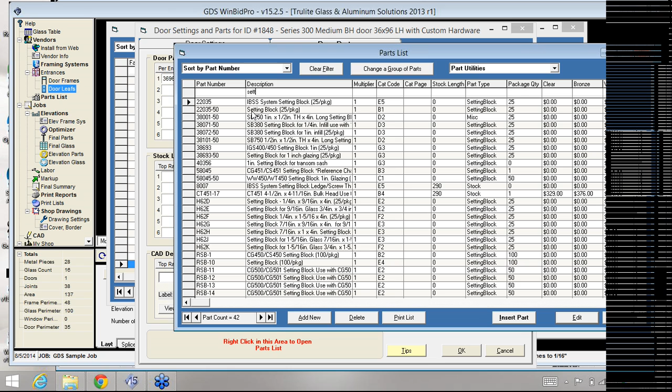Let's see, setting blocks - so I can search for the part, and here's a setting block right here. So I can go ahead and add that, say if I needed those and they didn't come with the package.

And then I can say I need 2 of those, so I put my asterisk 2 here, and it's going to give me 2 of those per light. So whether or not I'm using a muntin bar, it'll figure it out.

Then we've got, let's go down here to stock length. So if we are building or fabricating our door out of stock length material, this is where we put the part numbers in - notice we have the mid rail, top rail, bottom rail, mid rail.

But we also have the hinge style and the lock style, and for the pairs, the pair meeting style. So it covers basically all the stock lengths you would need.

And then you've got your glass stop here and the glazing gasket here, which is by the foot. So if you do fabricate and manufacture your own doors, you can have it show you the stock length cutting on your cut list, figure your gasket material required, and down to the glass stop material.

So that's it. Now, this one doesn't have any details for doors, but if you do have details for doors, it's the same as the framing systems and door frames, where you tell it...

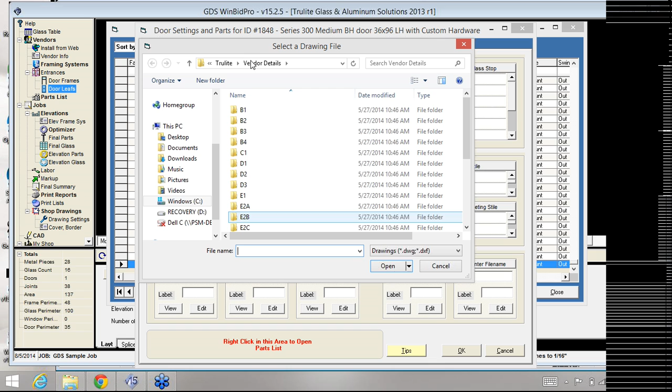Let's see here, I believe we double click in the file name field here, and then it'll bring up our browse window.

Let's say you downloaded a detail from the internet and you needed a top rail detail, or whichever one of these details you wanted. And even if it was a complete door detail, you could just put that in any one of these fields and it'll pick it up and show you that complete detail as well, even if you don't have the individual details.

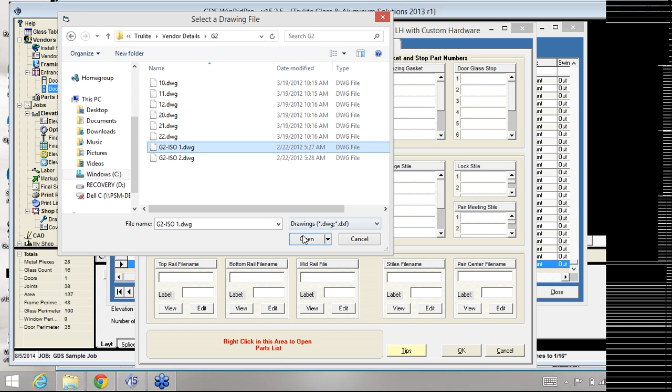So I could browse for one. If I knew this was my door detail I downloaded, I could select that and hit open. And then it adds it to this field, and then we can view it. If it was the correct detail, it would show us right here. So that would be included if you went ahead and did shop drawings for any job you added this door to, it would show you that detail.

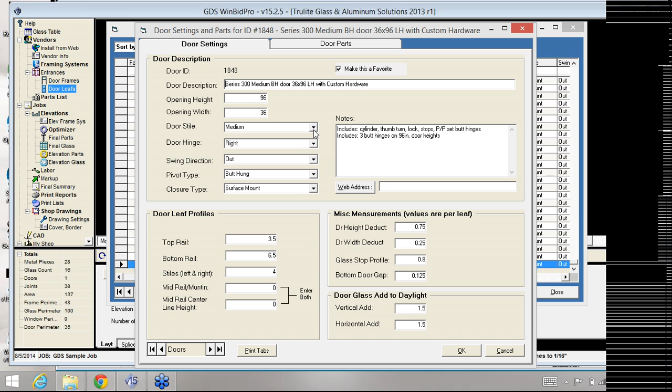So again, very similar to how it works in the framing systems and the door frames for details, showing details. So that's in a nutshell what your door leaf configurations look like.

Now let's go ahead and add one to a job, and then we can mess with it. So let's go ahead and create a little test job here. Door test job, finish is fine, and I always just like to call it first.

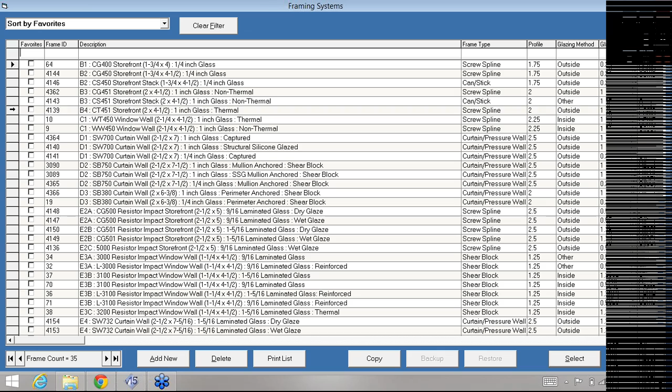Now let's have some side lights here, so I'll just go ahead and pick any old system. Here's a storefront thermal system, so I'm going to pick that.

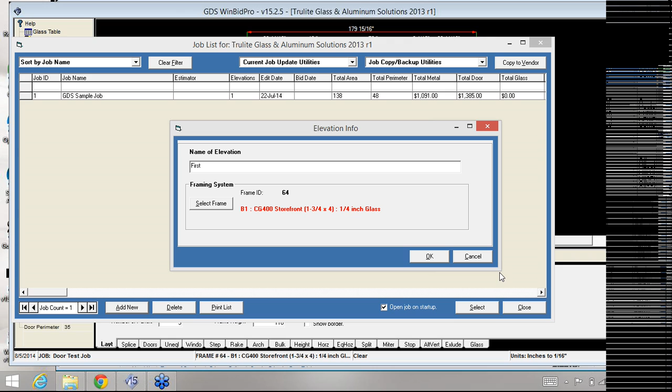And I knew I'd have that problem. I think I forgot to update my software on my computer. I apologize. So let's... now it's going to give me trouble here, isn't it? Let's see if it'll let me get out of this with a different... no. Okay, I apologize guys, I'm going to have to Control-Alt-Delete. If this ever happens to you, Control-Alt-Delete is the way to go, and then we can end the task and start the program back up. So, sorry about that. Yeah, I think I just forgot to update my laptop here. I don't use this much for the software.

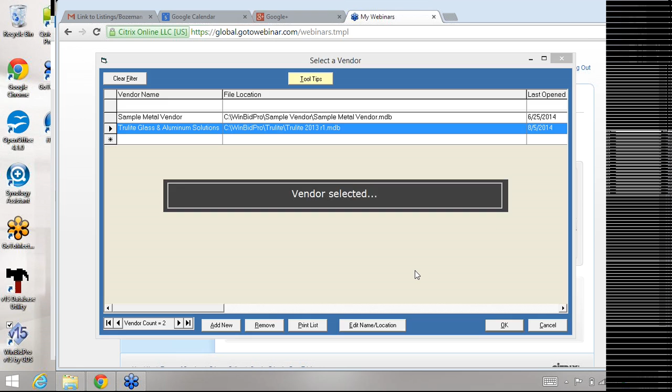But what we'll do is we'll mess with these doors here. And actually what I'll do is just create a new elevation. Let's see if we can do that. Okay, sorry for the other trouble.

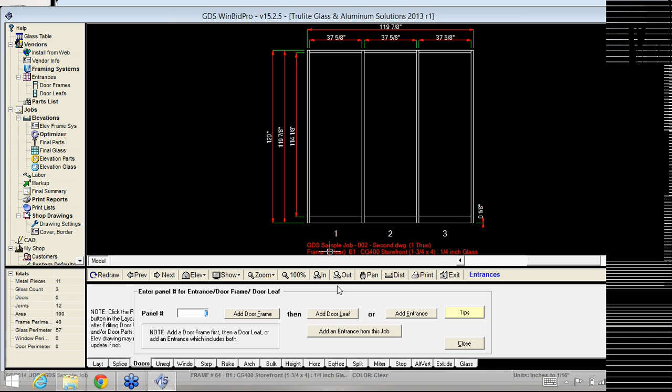So let's say it's 3 panels, 120 wide, 120 tall - kind of my standard frame. And then let's go to the Doors tab. We're going to say Add Entrance. Now remember, I tell it what panel I want, and if it's a manufacturer that's configured entrances - which is our next webinar, by the way - if entrances are configured, then we can pop that up and it'll put a door frame and door leaf in one shot.

And I can use the little filter bar here if I wanted the 96. There aren't any entrances configured for that, bummer. So let's go ahead and put a single right hinge, left-handed, in this opening. Now that stuck the door frame and the door leaf in there.

So now to see what the specs are, or what the settings are for that door leaf, I'm going to hit Edit Selected Door Parts. That's going to open up the same screen we were just looking at. So again, this is an 3684. If I wanted to make this - and here's what I like to do...

Usually I change the frame first, but if I wanted to make this a 94 by 38, just some oddball size, I would change those values here. I like to tab down to the next field. Now what it should do, if I hit redraw - sometimes it doesn't redraw the first time, so I'm going to hit redraw - you'll see there's a problem, right?

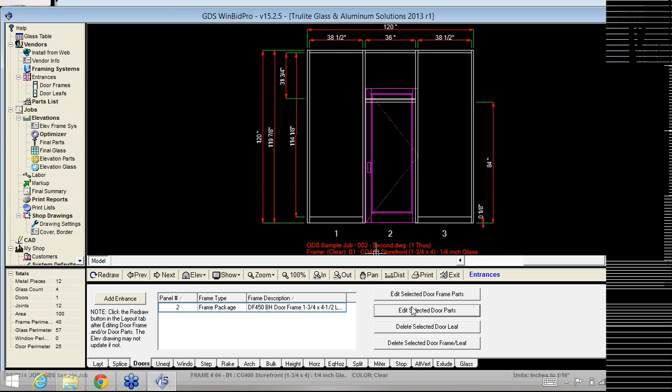So I put a big door into a smaller frame. Now I have to go in - it's showing me the height of the frame, but not the height of the door leaf. So now I forget already what I did - 94 by 38. So now it's time to change the door frame, so it's going to be 94 by 38.

So that's really what the door frame needs, is the same exact height and width that we entered for the door leaf. Again, it didn't redraw the first time, so I'm going to hit redraw, and now it's good. So now the frame matches the door leaf - that's what we want.

So the next thing we want to do. Now remember that when you do that, you're going to have to go in and make some adjustments to the part numbers, whether it's a custom door charge, whether it's a different package that you know of. I would just go ahead and add it here.

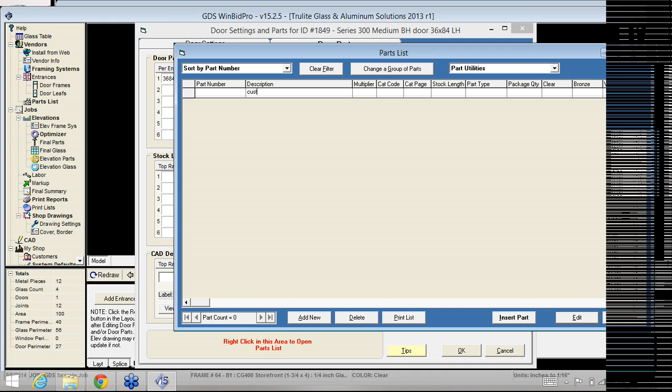So I'd click in that next row, go down here and hit look for the part number. I don't know what Trulite would call a door charge, but anyway, it could be any part that's basically needed for that non-standard door that we're working on.

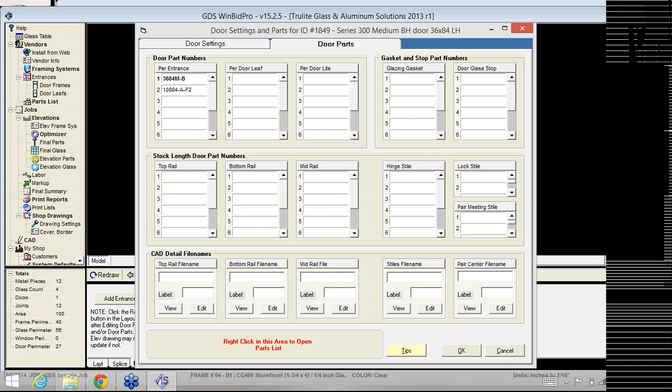So the same thing goes. I can click or just type in whatever part number I need for the door leaf. We're not really dealing with the door light stuff right now, but per entrance or per door leaf, I can just type them right there. So I've added those parts.

Oh, that was what I was going to say. So let's go back, sorry. Let's go back to here. Now, let's say the top rail is not quite 3.5, let's say it's something. Well, here's what we'll do: we'll do a 4-inch top rail, a 10-inch bottom rail, and 4-inch stiles. So we're going to make this so it's a little easier for us to figure the glass size.

And let's do that. So the door, let's say the height deduct is 0.5, the width deduct is 0.5, just to make it easier. So that would be a 1/4 inch on each side. This would be a 1/4 inch top and bottom.

Glass stop profile is 0.5, just to make that easier. And bottom door gap is 0.25. So that's another deduction in the height, basically.

But essentially, it's going to increase the gap at the bottom only and not center the door, top and bottom. So it basically determines how it shows, not only the height of the door, but how it shows up in the drawing. Let's go ahead and make these 1 inch for the added daylight.

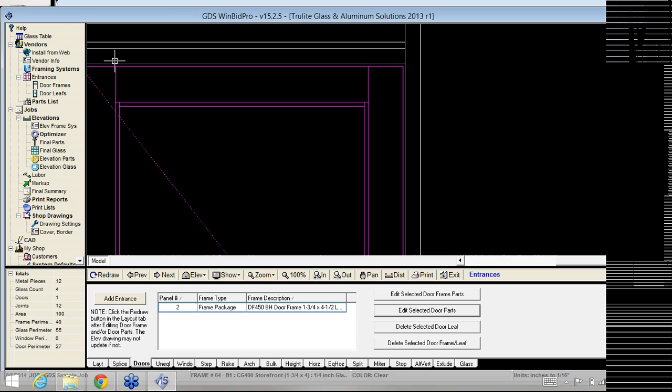And so here's what we got. Let's see if this shows up a little different in the drawing. I'm going to redraw. Now I'm going to click on my drawing and zoom in here. So if we zoom in real tight, we see the gaps around the door. So it's drawing it true, you know, WYSIWYG, or true to size, proportional, I guess.

And let's go down to the bottom. So even when we scroll down to the bottom, we see a gap down at the bottom for the threshold. We see the side gaps. So all that looks good. Here's our door stops, I'm sorry, our glass stops in the door leaf. And so it's done a good job drawing what we've entered.

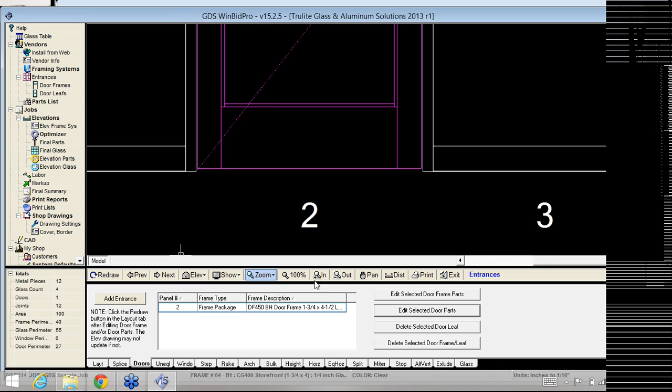So we've got our 4-inch stiles, our 10-inch bottom rail, all that. So now let's go and figure what the glass size should be. Let's go ahead and put some glass in there, actually. We'll just take any old type of glass, do it by light. Remember, for door glass, it's always by light. So we take that, we click on the door light, and now we've got our glass in there.

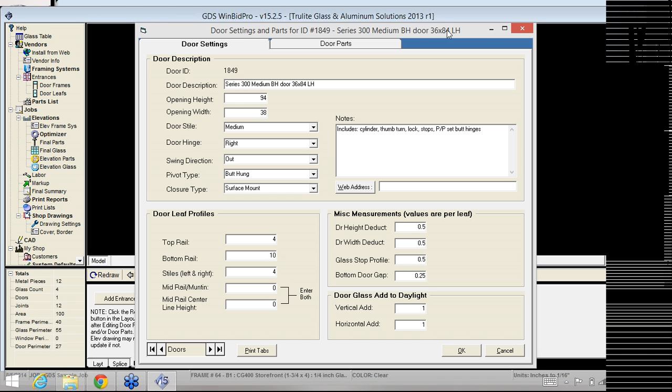So here's what we should be seeing with the door glass. We have, I'm going to go down here. So we have our 94-inch tall door minus our 10-inch bottom rail, so that's 84, minus our top rail, which is 4 inches, so that gives us 80. So the height of the glass is 80, less the 1/2-inch glass stop top and bottom, which is 1 inch. So that's 79 inches of daylight. So our daylight in height is 79.

So same thing for the width. Let's say we just use all those same calculations. Oh, and what we didn't take into account is the deducts here for the height deduct. So that's another 1/2 inch. So it's plus the door gap at the bottom of 1/4 of an inch. So that would be 79 minus 3/4.

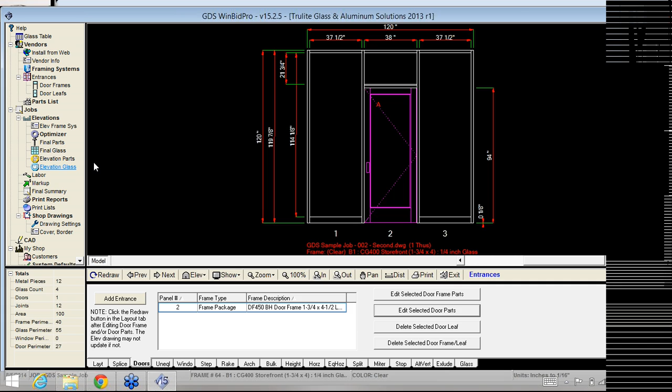So our daylight should be 78 1/4. Now we're adding an inch to that with our add to daylight, so that means we've got 79.25. That's what we should see when we go to our glass. So we're going to go to our elevation glass, our second elevation, and look at it. So here we are with 79 1/4. So we know that works right.

So as long as we are dialing in, obviously, our height and width, which is pretty straightforward, that's going to show us on the drawing. But if our rail sizes are true to size, based on the actual door that you're buying, our deducts are correct.

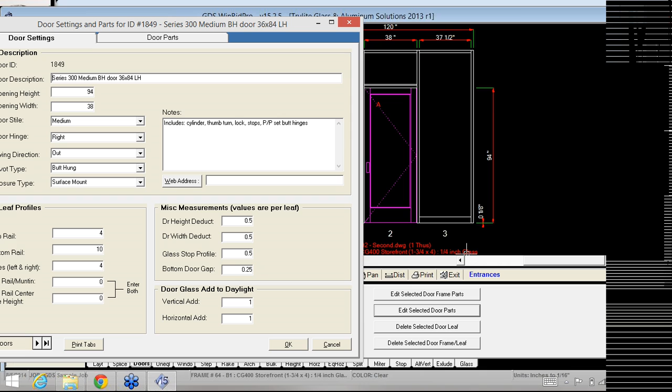So you can even work backwards. If you know the actual size of the door you are purchasing, you could work backwards and just make sure you're putting in the right dimensions here. You could even put in a top rail that is a little bit shorter and have no deduct. But the problem with that is the overall size. So really, you don't want to change your overall size too much. You want to make it easy to read, and make it the way it lists in the catalog and all that.

So anyway, that's how you would get your actual door glass size. You've got your correct added daylight, your deducts, your overall size is good, and your stiles and bottom rail. So all that is good, in terms of... well, hopefully you guys can hear me okay.

I'm on a Wi-Fi network right now, and it might be messing up a little.

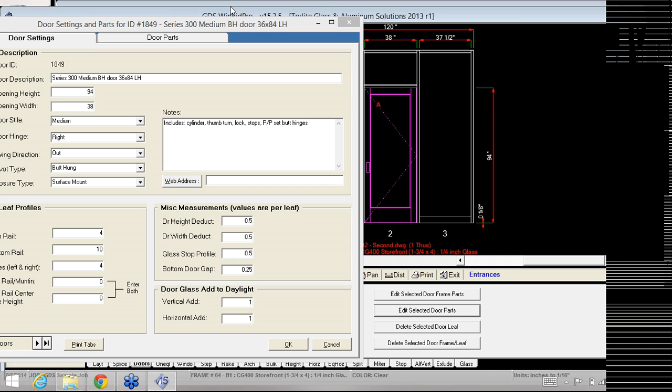Okay, so that's how you would dial those values in to get the actual correct door glass. And if it's not coming out right, the best thing to do, if you know your stiles are correct according to the catalog and all that, is to manipulate these deduct values - the width, height, and even the door gap. The glass stop profile should be true to size.

And then, of course, you can always mess with your added daylight for glass. The more you add to this, the bigger the glass gets. The smaller this number is, the smaller the glass gets. So it's a pretty straightforward relationship there. That's how you get your door glass correct, and that's exactly what you need to do it.

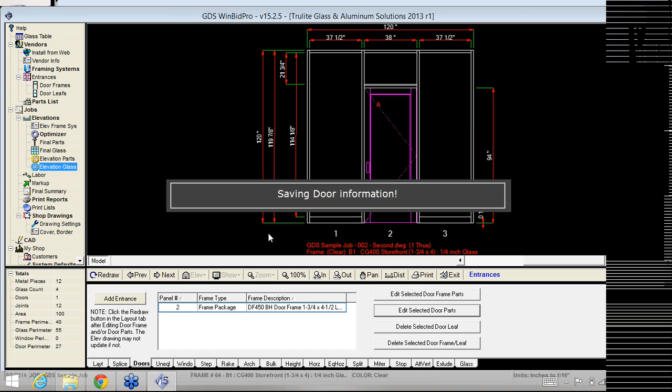So I had someone email me earlier about Herculite doors and heavy glass doors. So let's go ahead, and I'm going to use the same framing system. Let's just say this is a 2-panel opening - it's a Herculite and a side light.

And let's just say it's 110... oh, no, not that big. So let's say it's a 42-inch Herculite. Let's just say 60 wide by 84 tall, and there's no transom.

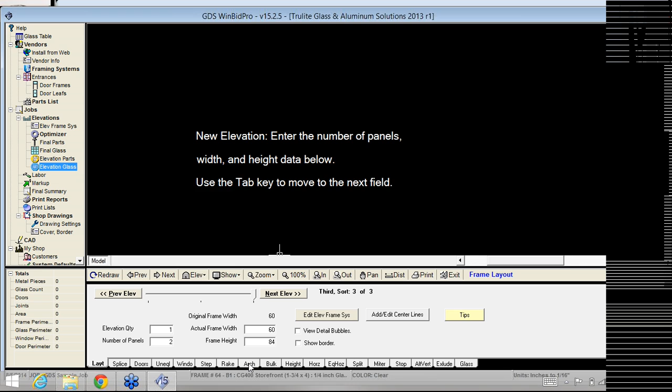So here's what we'd have to do. So we've got our basic elevation. I'm going to go to doors. If I don't have any door leaves and door frames for a Herculite, I'm just going to go ahead and put any old door in. So let's go ahead again - I'm going to put it in the first panel and add an entrance.

And this is going to go a little bit long maybe, so hopefully you guys have a few extra minutes to watch this. I'm going to go ahead and pick - where's my other favorite? Oh, it's not sorted by favorites in this, I'm afraid. So I would have to kind of look for it. Well, I don't know if I did favorites on the entrance, did I? Or was it just the door leaf?

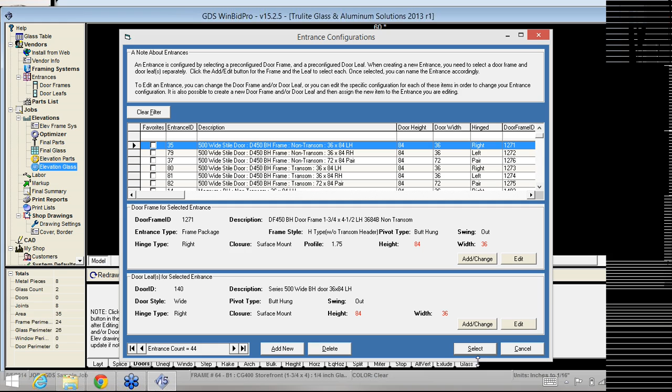Okay, so I'm going to go ahead and pick this one. It's an 8436 entrance. So now the problem is 84. So actually, what it should be is 86 tall.

So let's change that to 86. So the opening size is 86. Actually, it's 85 3/4 - we're using a 1 3/4 frame. Let's put that in. Okay, so now you saw the weirdness there at the top at the door head. That told me that something's not right with my dimensions. So our overall size matches the door height plus the door head.

So now, if we want to mess with Herculite doors, all we're going to do is go in and edit the door parts.

We're going to tell it, let's say it just has the top rail, bottom rail, or maybe even just the bottom rail. So let's say it's all glass except for the bottom rail. It has a floor lock kind of situation. So the bottom rail is going to be 8 inches. Top rail is 0, and the stiles are 0.

Now the one limitation is, remember, if this is a true 8436, we're going to do an added daylight in the vertical by, let's say, it has to be a 1/2 inch, or maybe 3/4 of an inch. Or actually 1 inch, whatever the add is for a Herculite with a bottom rail. But the horizontal add would be 0.

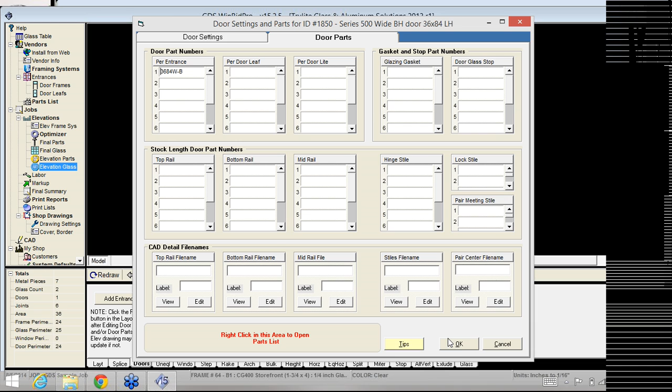Now what we would do is obviously make sure our part numbers reflected the bottom rail, the hinges, the handles, so any hardware you need for that Herculite door, this is where you're going to have to put it. Per entrance is good enough. You can do per door leaf if you want, but in the per entrance you can have up to 10 parts. If you need more than 10 spaces, that's when you start sticking things in the door leaf column there. So that's the other thing, is make sure you're putting the correct hardware part numbers in.

Let's go ahead and redraw one more time. So now we've got what looks like a solid glass door with a bottom rail, and we're going to go to the glass, and let's see if we want to put in the glass thickness of 1, and it would be heavy. So you might have to add your glass for this too.

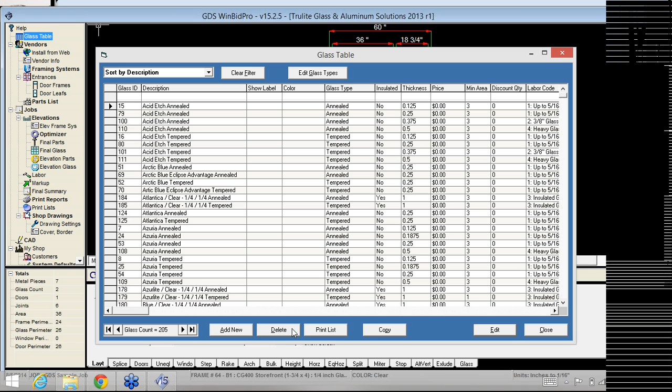That's the other trick, is if you have to add glass to the glass table, then we go back to the glass table here. So first thing we want to do is get off the glass tab, go back to the layout tab, go to our glass table, which I thought I clicked on. There we go. And let's just say we add a new part for glass.

So Herculite door. So this, assuming that you're building the door. I mean, if you're buying it, then it's just a part number, obviously. But let's say you're building your 1-inch heavy glass door.

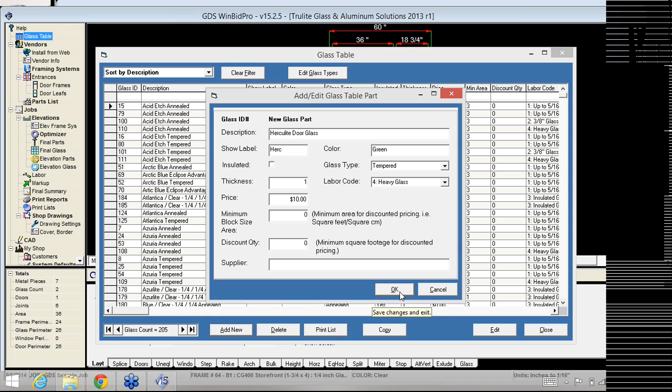Door glass. And then we can even put the label in there that says Herc. We could say it's green. And it's definitely tempered. And then we would say here for the labor, it's heavy glass. Thickness will be 1, 1.0. It's not insulated. Price, this would be a square foot deal. So if it's $10 a square foot, whatever. So supplier, you can leave that blank for now. So okay, we've added that to our glass table.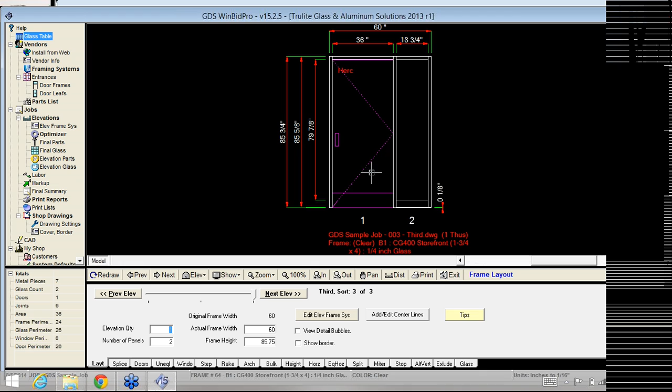Now we go to our glass, and I can type in Herc for my description. Oops, I spelled it wrong. Just keep spelling it wrong. So now I've got the Herculite door glass selected. I click on the door light, and now we're ready to go. So there's our Herc. We're ready to go to the elevation glass, and it's our 3rd elevation.

We should see door glass and 76 5/8. Now I can't remember what I was, but you understand the relationship from before. We could change the height deduct, the bottom door gap, to affect the... well, let's just check the width. So we've got a 36-inch door, and we had a 1/4 inch width deduct, so that gives us the correct door glass width, 1/8 inch on either side.

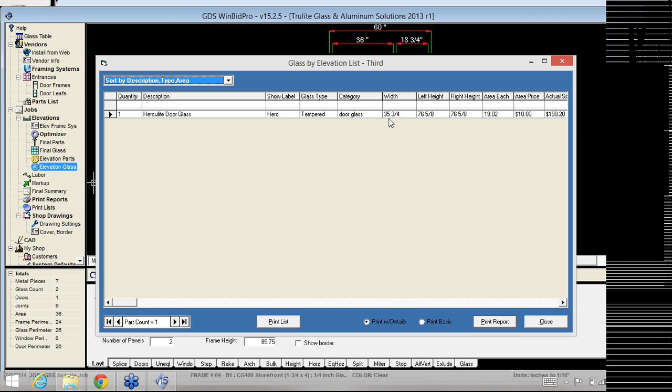So for the height, we would just close this. If we wanted to manipulate the glass size, we'd go back here and start messing with these values. Either take out the bottom door gap or change your overall height deduct. Those kinds of things will directly affect the height of your door glass. Same thing goes with your vertical add. I forgot to add the daylight when I was figuring this, so that's going to directly affect your door glass size as well.

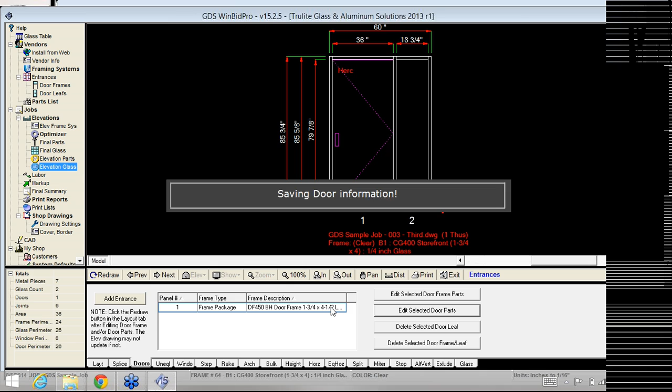Now, one last thing, that would be your Herculite door stuff. Unfortunately, our program doesn't draw different handles and things, or the hinges. It's not going to give you templates to cut the glass for the hinges and all that, but eventually we want to add that type of functionality. It's just something it can't do right now.

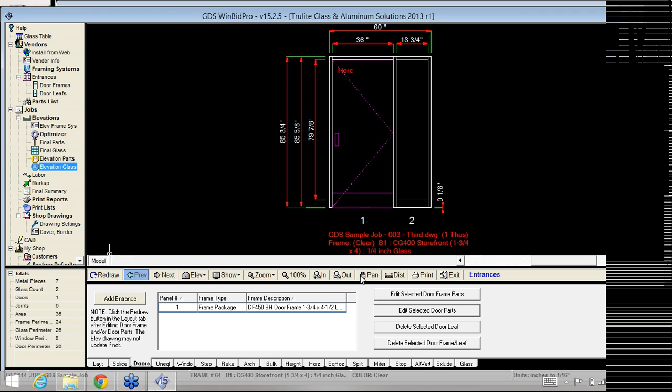So let's go back to elevation 2, and let's put that Muntin bar in. We're going to edit selected door parts, go to the Muntin bar, and do a 4-inch, also called a mid-rail. So the mid-rail center line height from the bottom of the door, let's call it 36 inches. And then I like to tab off of that. Click OK.

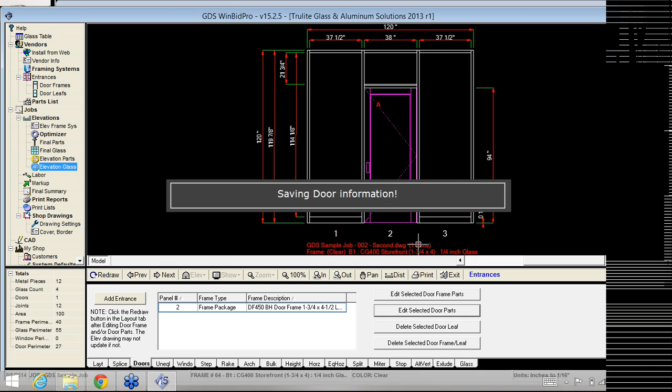And again, I wish it drew it the first time, but we hit redraw. So now it drew that in. So one way to check this, what I like to do sometimes is, and that's going to give us 2 pieces of glass. Now notice how it didn't automatically give us 2 pieces of glass.

So what I'm going to do is go back to here. I'm going to re-click that one just for fun, and then click that one and add glass to that second piece of the door light.

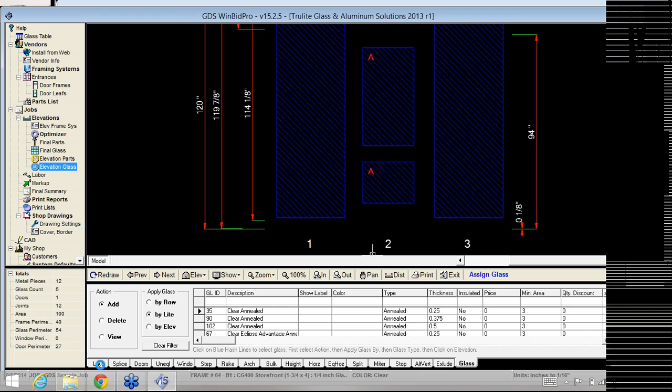And what I was going to say is I like to go in here, I'll zoom in, and then I will see how it gives you the door stop or the glass stop on the bottom light as well. I use this little distance tool, and from the bottom of the door I click, and then to about the center line, I'm just guessing here, that's about 36 inches. So it put it in the right spot according to what I told it.

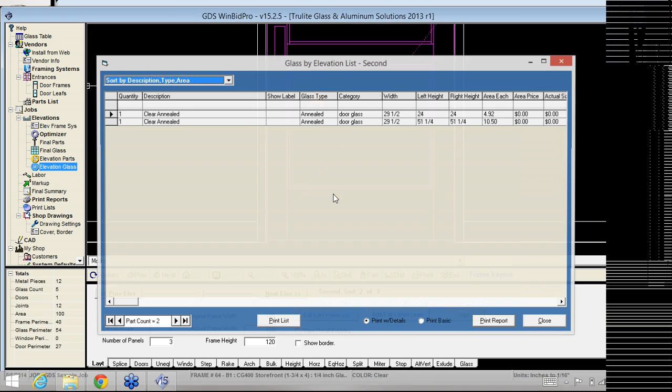So that's your Muntin bar. And then if we go to our elevation glass for the second elevation, it's showing us 2 pieces of glass. They should be the same width, which they are, and obviously the heights are different. So that's it. You can adjust the placement of that Muntin bar just by putting a different centerline height in.

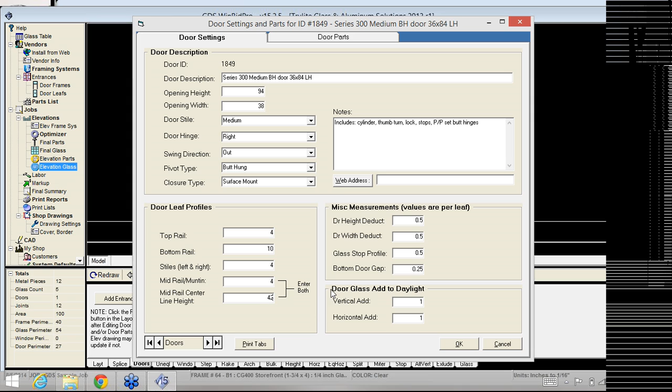So we would go back to here. If you wanted equal glass sizes, you'd have to figure out how high it has to be to get you those equal sizes. But basically this value here, we would change it. I could call it 42, tab off of that, hit OK.

And this time it drew it right away. It's funny how that, sometimes it does, sometimes it doesn't. I noticed because before it was down below the top of the handle. So now it's 42, so the glass size has changed. It's a direct effect between what you change in that screen and what you get in your door.

So that is pretty much it, I think that covers everything. I know one of the goals in the future too is to make the door hardware entering a lot more user-friendly. Right now you just have to know the part numbers, find them in the parts list, add them, or search for them and add them to your door configuration. But we want to make that a more streamlined process in the future, so keep that in mind.

But so the next webinar we're going to talk about the entrance screen, which is that combination of a door leaf and a door frame. It's really easy to create entrances. It shows you what door leaf and frame you're using with an entrance, and really all it is a name you're giving that combination. So that's all an entrance is. You're picking the combination and you're naming it, and that's all it's needed.